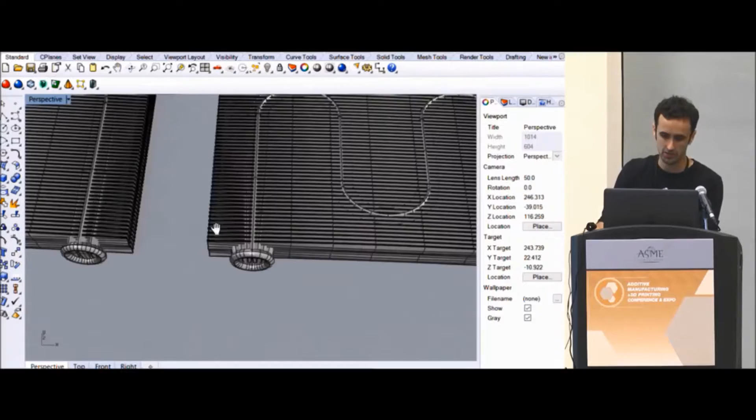We basically did the equivalent of, since I can't actually show you the actual radiator, an academic exercise: what are the design steps and thinking, and how I would basically make a radiator better. And so starting all the way over here, and I might even do it in plan view.

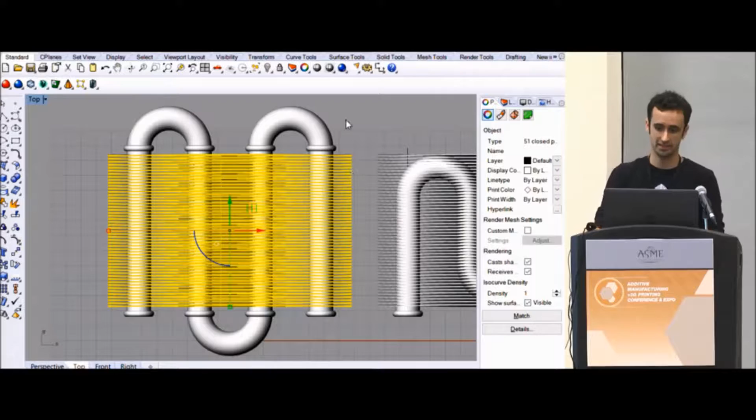Standard radiator, we've got three different U-bends with another series of 1, 2, 3, 4 straight pipes, and then 51 different surfaces or pieces that you would have to cut and then weld onto this object. And the only reason these things are outside of that radiator shape is because it's really hard to cut and weld onto a crazy surface. If you were to slide this down in here, for instance, it'd be really hard to cut those fins to match that specifically and have it work really well. So a lot of times, I'm not saying they're lazy, but they just sort of drag stuff out and on top.

It makes a lot more sense. It's so much easier to machine. I would do the same thing. But then with 3D printing, right away I can just put the U-bends inside of the object. It's no harder to do that. And so this has already increased the surface contact. If this is a radiator with hot water running through here, I've already increased the surface area contact with the fins automatically, and I've reduced the overall bounding box of the part by not having these U-bends on the outside, and there's no welds or soldering. That's one straight pipe all the way through the whole object.

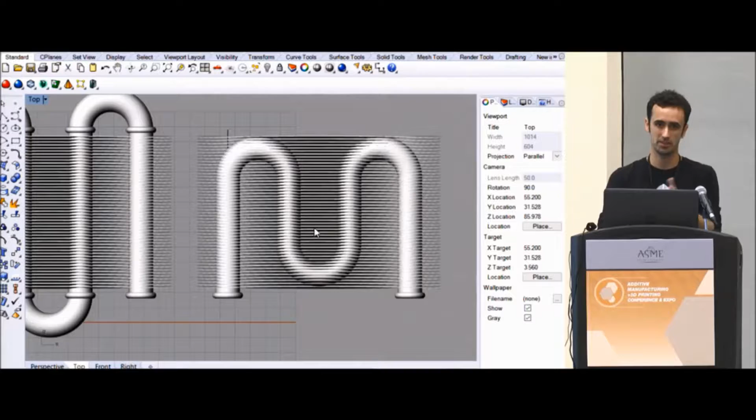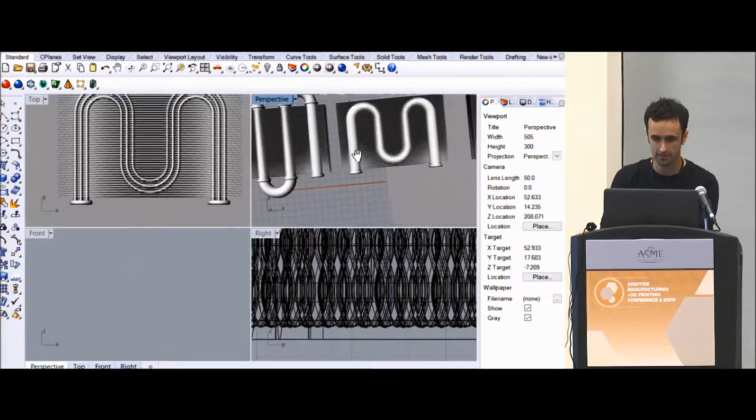But maybe the goal is, I really want to add more surface area to this part. I could analyze the surface area of that pipe: what's the most surface area I can flow water through? What's the best shape for it? In this case, I was just sort of lazy, and I made 3 pipes that are thinner in cross-section, but they are not just circles. They're kind of distorted oval-shaped pipes running through there.

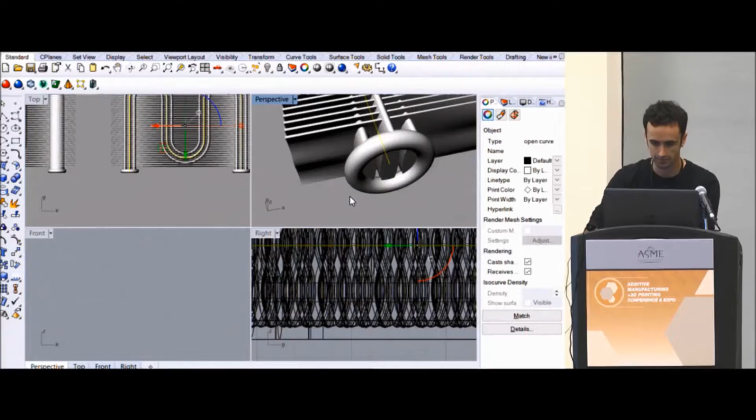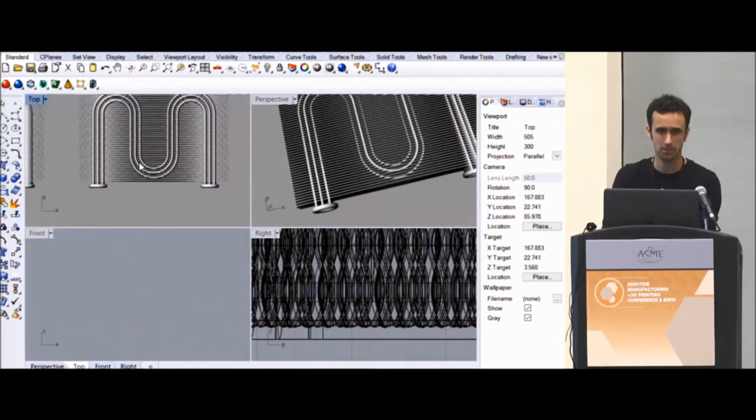And so, for instance, the surface area of just this pipe. I think there's a curve in here somewhere. There's my curve. Where'd it go? Pipe 4. So this is my original pipe. If I type in area, I have 5,000 square millimeters. If I type in the surface area for all of these 3, I now have 12,000 square millimeters. I've immediately increased the surface area without really doing anything to the overall geometry. And the volume is, I think, still approximately the same. We've just got a higher surface area. It might be higher volume too.

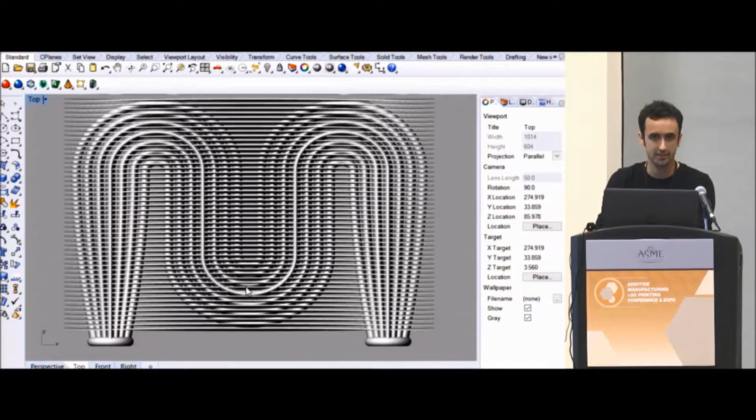Let me zoom into a bigger screen. Now there's a lot of unused space in here and here that can't be that efficient, right? If I can pass air in between those gaps, that's a giant area to pass air through. I could fill that with more surface area and more areas for water. So I increased the number of pipes. They all still taper, but I now have a really large surface area of pipes, all with the intention of getting heat off of the part as fast as possible.

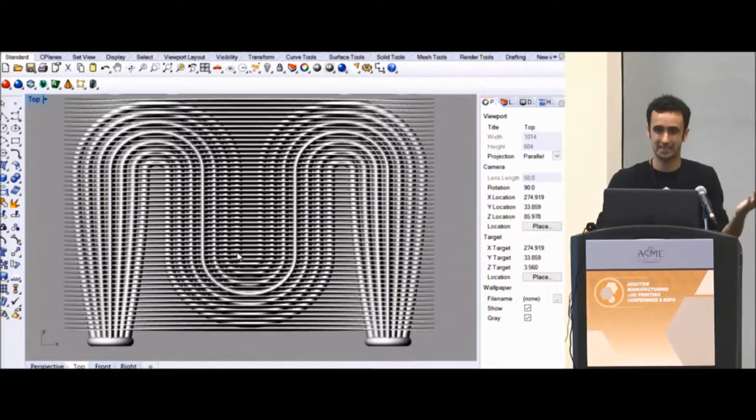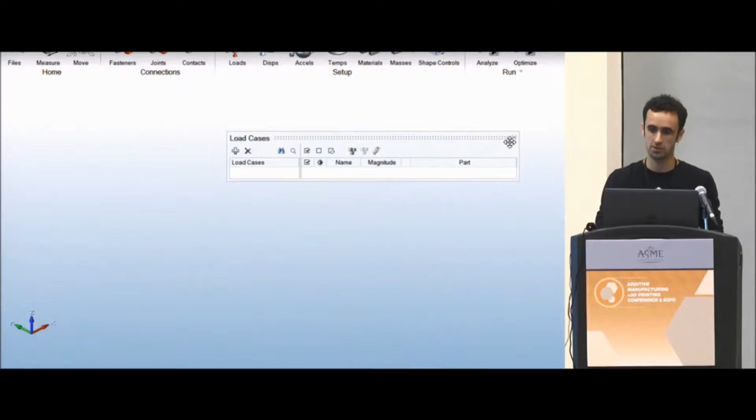Now, is this shape really the best shape? Do we know that a funny U shape is the best possible way to get rid of heat on an object? Maybe something like a sea fan is a better shape, or maybe a leaf. You could even use some sort of heat analysis software. In here, that heat button, I've never clicked on it before, but it will probably generate an interesting shape that'll be good for whatever your parameters are. It's more than just a one button click, or I would do it for you guys.

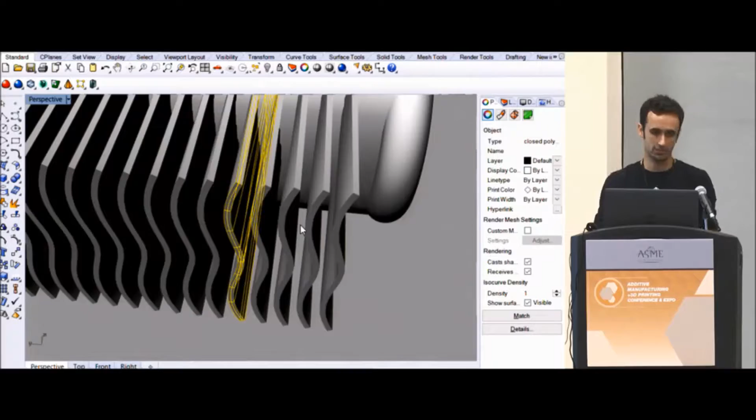And then I moved on to, what happens with the fins? Let's start refining the louvers. And so I added an extra set. Let me go real big here. Instead of having standardized fins, stamped out of a block of steel or extruded off a line, where everyone's identical, let's make 2 different kinds. So we have 2 different heights for the air to pass. I was envisioning the air passing from the top and going through it, so it would get a little bit more compressed as it goes through there.

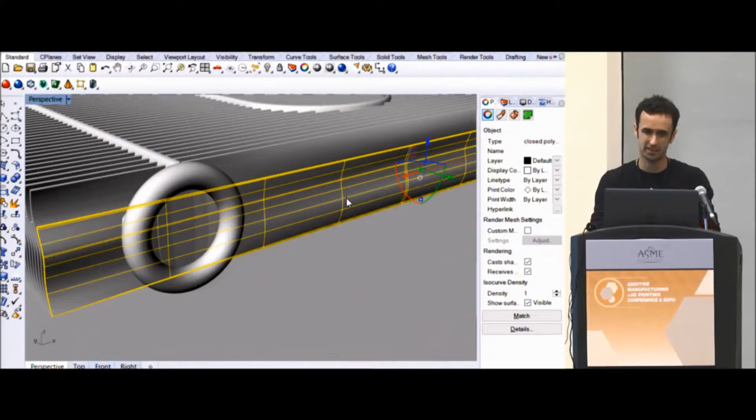And then, is a flat sheet the highest surface area possible there? No, that could be full of subtle holes, or maybe a surface texture, like that hexagon surface texture on there, just to increase the surface area yet again. And you can keep going.

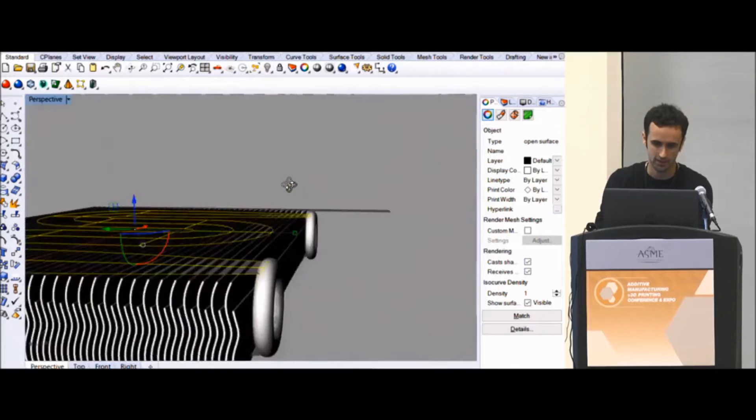Like you can just, what's the best possible, just starting from a radiator. And then I sadly forgot to save it, but at a certain point I was like, do I have a bottom one down there? Yeah. So maybe tubes aren't the best surface area at all. Maybe I need to actually run a,

Did someone have a question?

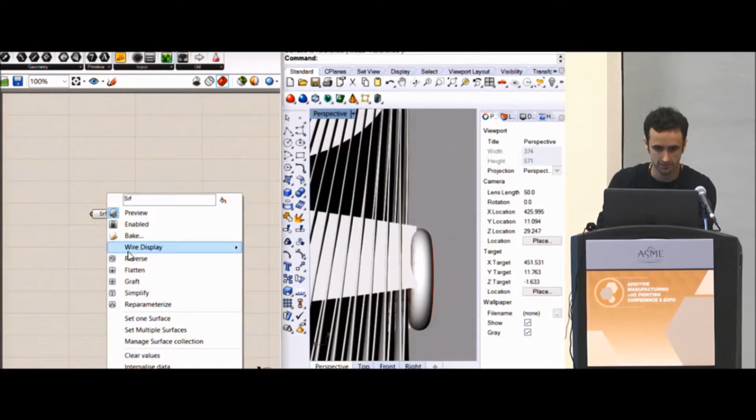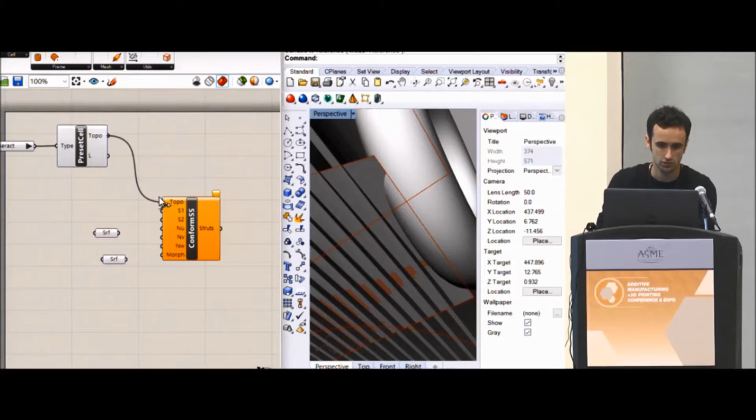So I can totally go in here and very quickly, oops, wrong surface. Set one surface, that surface, set another surface, that surface, and then if I basically conform some sort of topology to those surfaces, preset cell, tesseract, topo, surface.

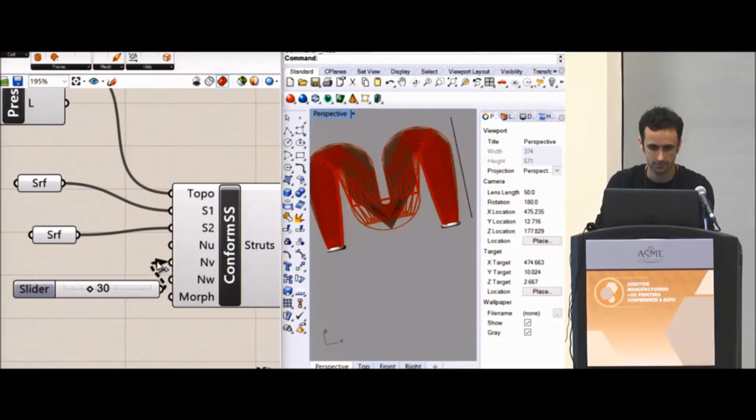And just for the sake of ease, I'm going to hide these things so you can see what I'm doing. And I have to increase the 30 and 30. So now I've got this crazy structure running through here that I could maybe flow water through. It's still just curves. And so maybe I make it two tall.

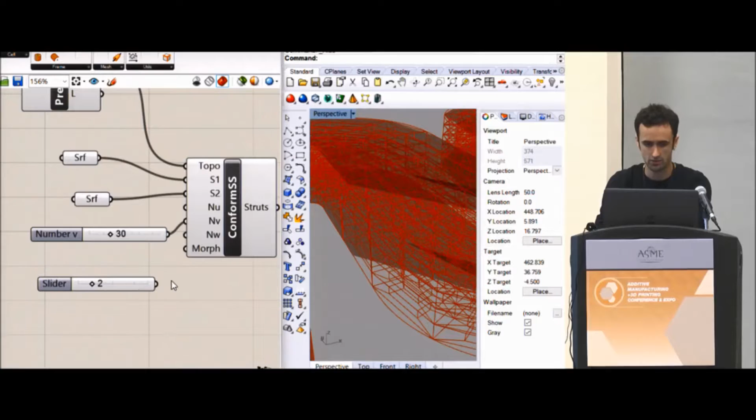And then maybe that funny box structure isn't the best possible structure to flow stuff through, so maybe that's better, or that's better, or that's better, or this is better. And then after some testing and some analysis, I've come to the conclusion that maybe I like this kind of structure for having fluid to flow through.

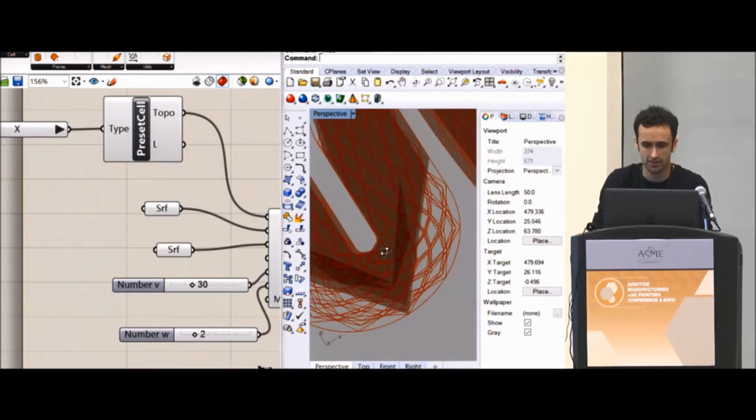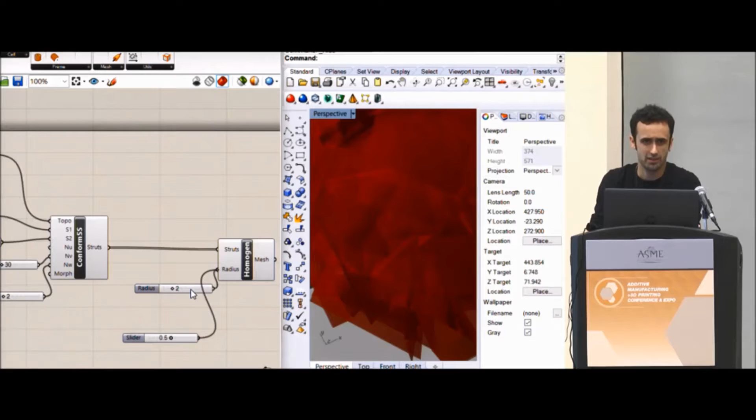And so if I really quickly just basically mesh it all with two millimeter radius. It might take a second because that's a lot of pipes. But that was a really quick way. And oops, yeah, it blew up. 0.5. Sometimes that happens. But that was, and we haven't even really started to refine it at all. I'm just in sort of, yeah, there we go. If I bake this.

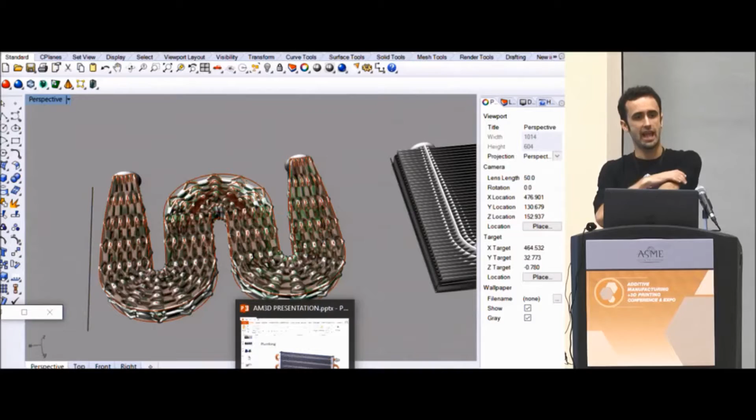So this was one that, I knew a lot of Grasshopper, I didn't know a lot of Grasshopper. This was a combination of talking to people in the field and basically a background in these things. If I had been a SolidWorks person, this would probably be somewhat similar, but leveraging the parametrics of SolidWorks rather than the parametrics of Grasshopper. I originally started in architecture, and so this was actually leveraging a lot of architectural concepts. Once you hollow a part, for instance, it's now closer to a building than it is a standard industrial design part.

Once I make a hollow block, now I have to think of how I support the top of the block. Now you've got columns in it, and now it's basically a small building. And same with if I have fluids flowing through a hollow object like this, it's the same with the doors on this building. And then maybe this room is actually a bioreactor. The scale is just different.

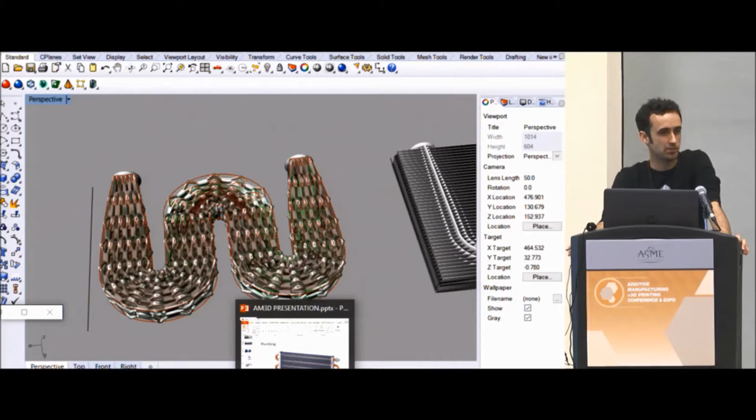And so that was kind of where I originally started, but the resources are sort of scattered throughout a lot of different industries online, because I don't want to say 3D printing is so new, but since the consumer boom a couple of years ago, it kind of became a new industry all of a sudden. And so there's a lot more resources coming out all the time.

I definitely follow a combination of architects, industrial designers, artists, and engineers that all have different specialties. Some artist will figure out how to make some random shape, but he made a bone structure doing it, and it's just a blob. But however he did it is totally applicable to actually making an actual bone structure inside of objects rather than just a lattice structure.

Maybe you get the incredibly complex gradient. Compared to the bone in my femur, the complexity in that bone is light years ahead of anything I can make in Rhino right now. But this one artist figured out how to do it. And so I was like, how did you do that? And then we took that exact same technique and just applied it to an engineering object. And so there's a lot of cross-pollination between different industries.

The eggshell molding came originally from casting stuff in ceramics, and it was like, hey, I can recreate that process with a different material on a different machine, but I would never have known if it hadn't been done in a different industry before. But I will say, almost everything I know that wasn't learned through experience was learned off of YouTube.

I don't know if that's a good or bad thing, but in school, when I would ask questions to my professors, they would say, there's great resources online. And after 4 years of hearing that, I just decided to actually see. And there are great resources online, and you can really do most stuff from YouTube or digging through some blogs. There's so much free information out there, and even free scripts people have written and just give out.